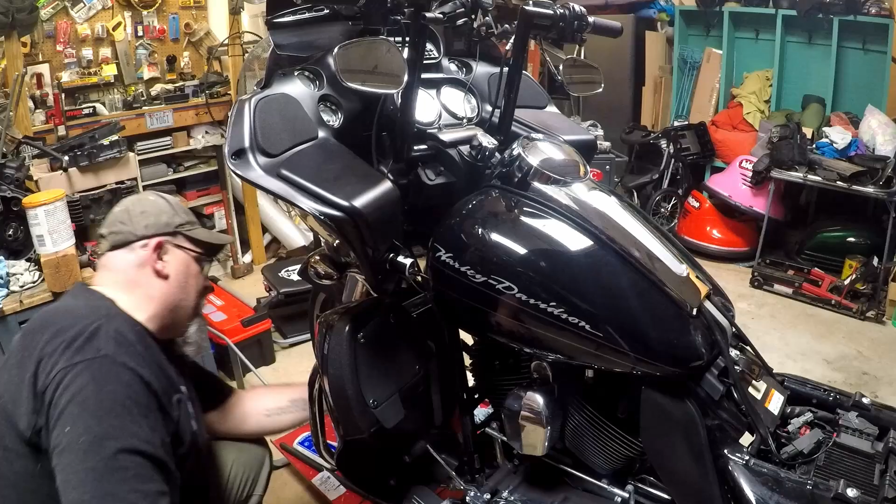I knew we were going to have to loosen and disconnect the clutch cable, so I went after that first. Even though the manual says you can do the swing test without doing it, I decided to go after that anyway. After getting the cable loosened up, I took off his mirror and handguard so I could get the clutch housing off the handlebars. I took that off, got the little snap ring out, and pulled the clutch cable off.

Then I decided to mount everything back so I could get it back to stock configuration. Yeah, the handguards are still on there, I understand that, but they don't weigh all that much and I don't think it would affect the test. With it put back together, I'm checking the swing of the handlebars to make sure there isn't any grinding or problems with the bearings in the steering head, and it seems okay.

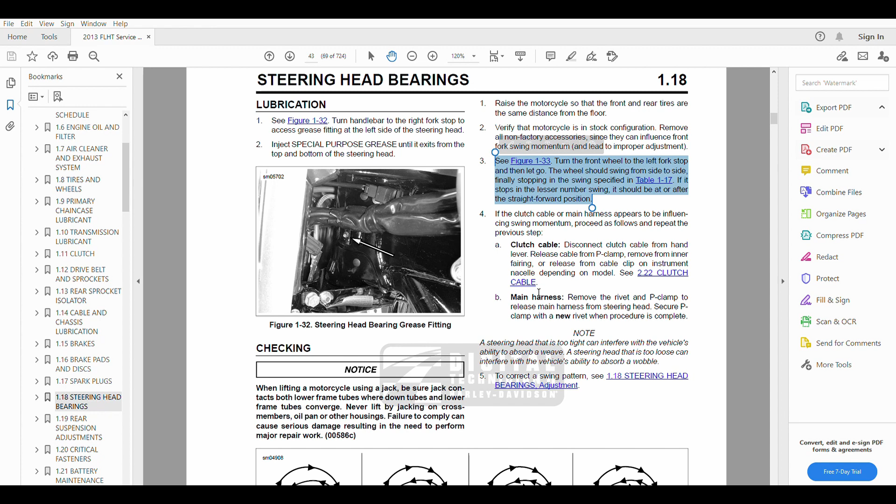So with the bike put back together, we go back to the service manual and prepare for our swing test. Step 3 says turn the front wheel to the left fork stop and then let go. The wheel should swing from side to side, finally stopping in the swing specified in Table 1-17.

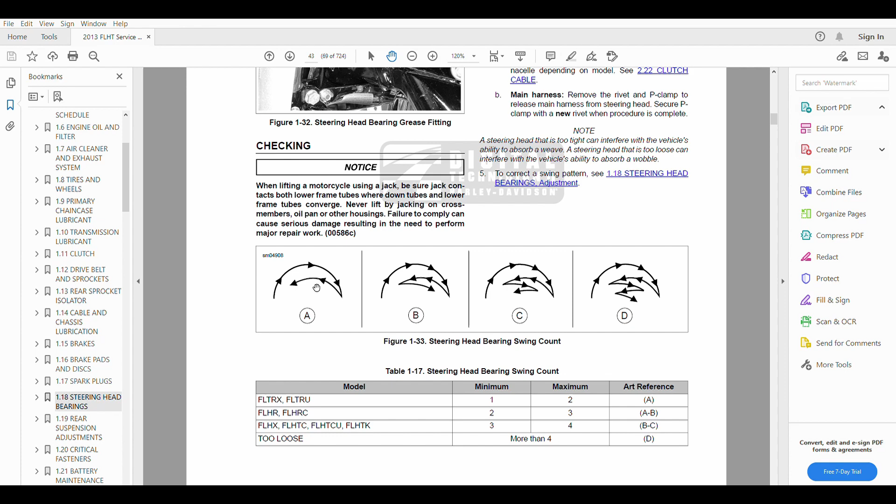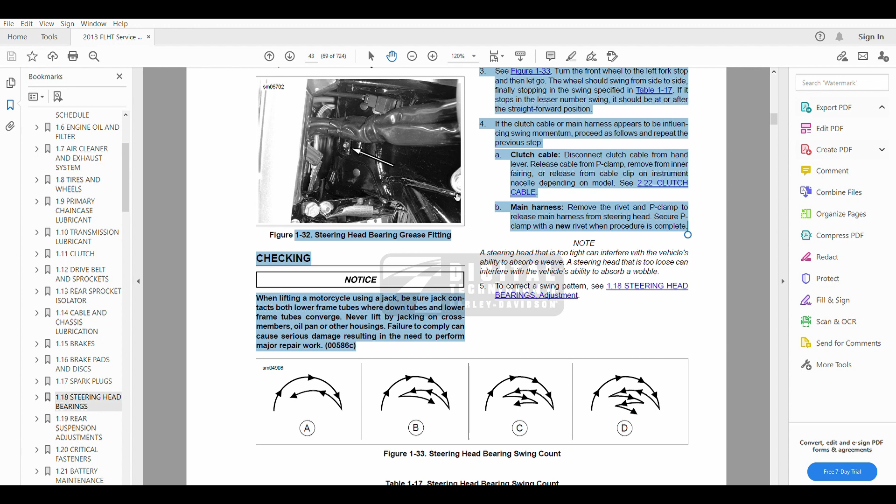For an FLTRX, it shows reference A, and it should be one swing. Here you can see it talks about disconnecting the clutch cable. So I kind of jumped ahead in my steps and decided let's just get rid of this clutch cable and start right away.

It also talked about removing the main harness. I decided not to do that at this time. We can come back and do that later.

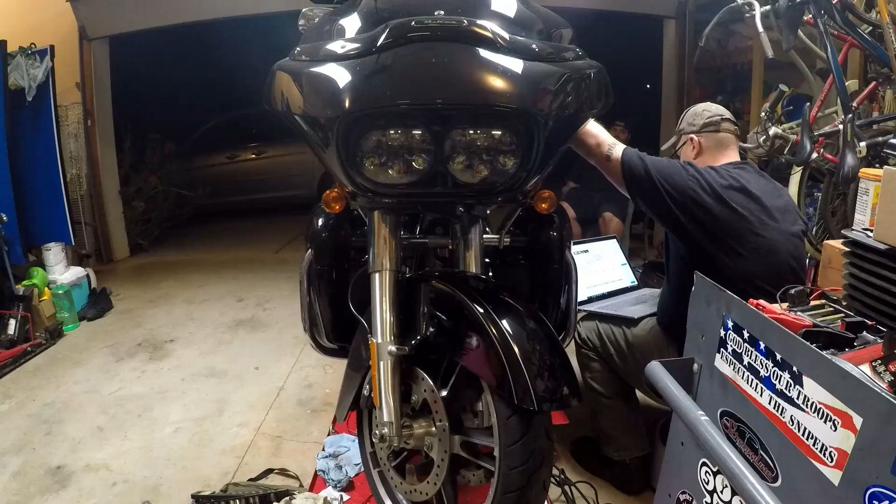But this note that I'm highlighting here says a steering head that is too tight can interfere with the vehicle's ability to absorb a weave. A steering head that is too loose can interfere with the vehicle's ability to absorb a wobble. So my thought is, this is too loose.

So let's go ahead and drop it and do the test. Now it should swing one way and then swing back the other, then stop. Note picture B there, where it has 3 swings in it. If you watch here, it had a slight third swing, 1, 2, and then back a little for 3.

Didn't do it much, but it does it a little, which tells me that possibly the steering head can be slightly loose, which could be the explanation of why we only have this wobble from 55 to 60 miles an hour once you get in that harmonic zone.

So my thought is if we can just tighten the steering head bearing, the star adjuster nut just a little bit, maybe we can get it back to where it's 2 swings.

So my next thought is, all right, let's strip this down one layer further. Let's get the dashes and the gauges out, and let's get the plastic gauge housing out, and let's strip it down one more layer and get the main harness disconnected and out of the way. So that's what we're working on here.

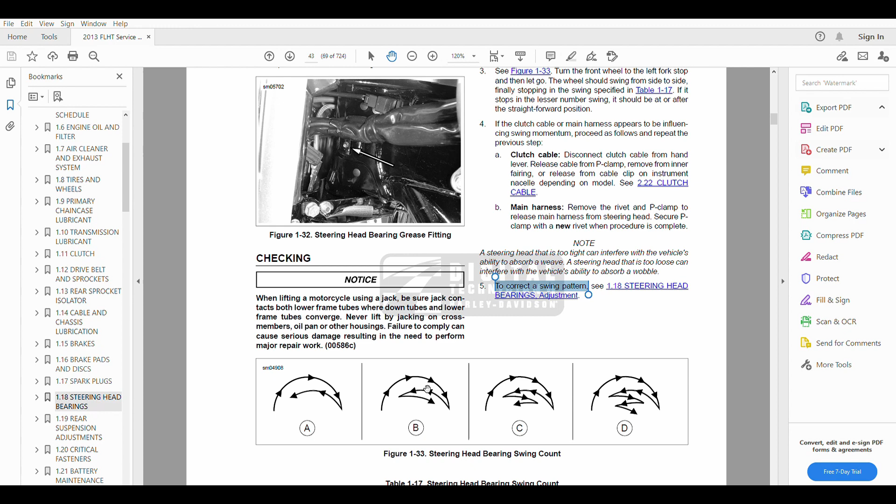That will help me see a true story of what this steering head is doing. So despite doing that, I'm getting pretty much identical results. 3 swings, which looks like more of what you're seeing here in picture B.

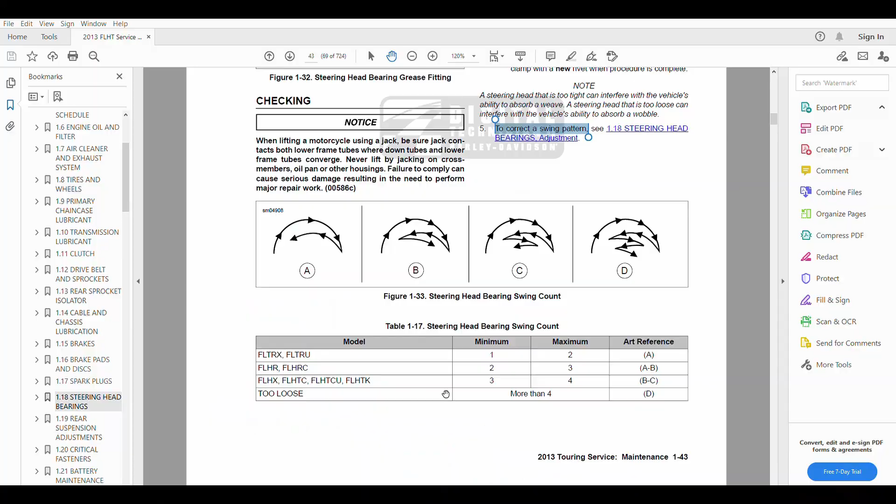2.5. So from there, you go down to the adjustment. And the adjustment basically says on fork fairing models, you pretty much should probably take your fairing off because you're not going to be able to get to the adjustment nut without doing that.

So that's my next step, and that will be in the next video. Loosen up nut number 1, adjust clockwise nut number 2.

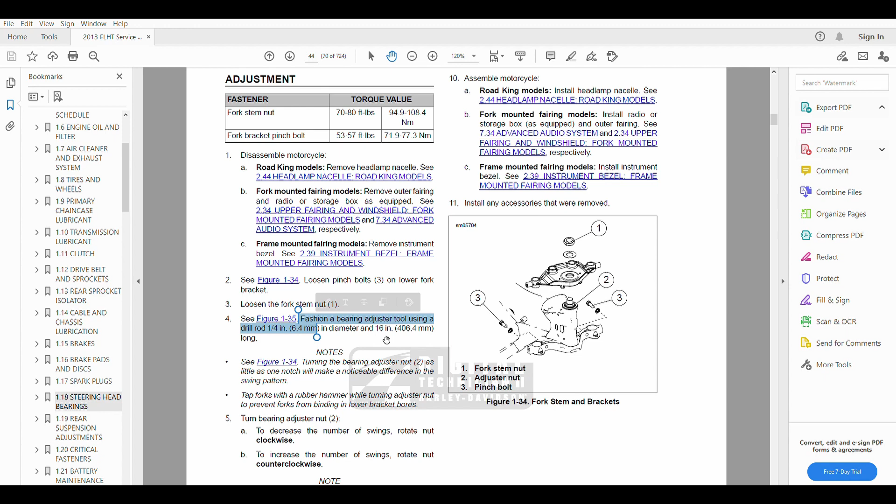The funny thing about it is, if you look at this picture, there's the adjustment tool. In step number 4 of this, it says fashion a bearing adjuster tool. Well, I think you can really use a flathead screwdriver. That just made me giggle.

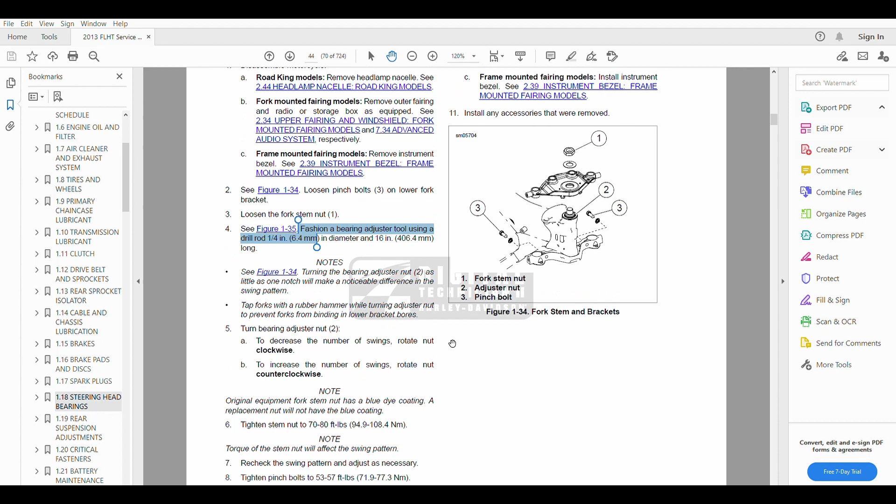Fashion a bearing adjuster tool using a drill rod. Okay, Harley, I'll go ahead and do that. Or I'll just use a flathead screwdriver. And then you can use that to adjust nut number 2.

So that's the plan. Next step is we're going to take that front outer fairing off so we can get to the adjustment nut. We're going to adjust the nut. We're going to loosen the top nut, adjust the adjuster nut, tighten the top nut down, and do this swing test again and see where it puts us.

Kind of frustrating, a lot of work. Got to make sure you loosen up your pinch bolts because you don't want to bind your forks in there. That's a very important part of the step, but we'll kind of go through this again as we go one step deeper into this road glide and see if we can't get his problem solved.